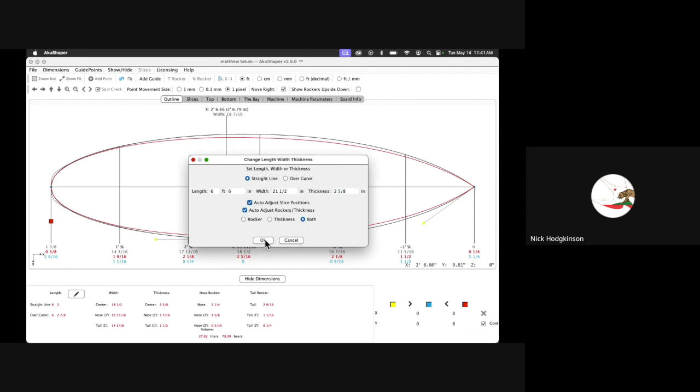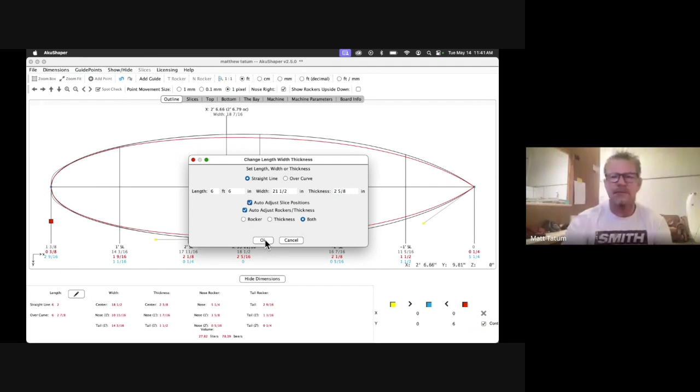It was already on. Before you click OK on that, do you ever not auto adjust? I do, yeah, sometimes - depends. For instance, if I'm working with a file I already have and just need to make some changes, like say I have an old round tail that I'm going to bump out and give a little hip at the foot section, or pull the nose and change the rocker, I won't auto adjust because the board's already there and I don't want it adjusting different little areas. But for the creation part, from the start, I'll leave them on and let them work, then go back and check my numbers.

So for this one, we got this board all set up. I can take this and kick off the original board real quick so we get here. For instance, this guy wants it at 14 in the nose, so start from the front.

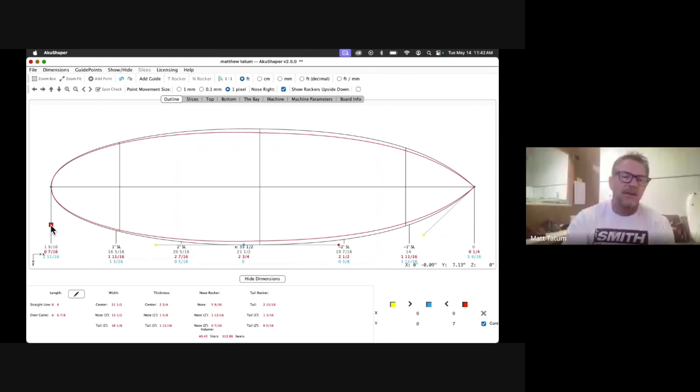I like to use these points like this. So now I got 14 in the nose, and then in the tail he wants it to be about 15.75, so that's 15 3/4. He's already got a model of this particular board - it's a shell shape, but this is like his updated version. The one he's riding before is a swallowtail, so he wants the updated version as a round tail, but he likes his numbers.

So yeah, a good surfer.

So this would be my outline, it's 21.5. I would turn on this guy right here, center mass, I want to see where that's at. And this right here, I want this moved up, and it moves that center mass up as well - see it moving? I want that pretty much right in the center, so now it's at 21. And you can see what the board looks like now, it's at 14 - by moving that forward I fattened it.

Yeah, and thinned it in the back. So I'm going to go back to my 14s. Now I got my center mass where I want it, take this thing back out.

I really like something that they did before - volume distribution, show volume sections. I like that because it allows you to set up a balance on what you're doing. Then I would go here and get my rockers.

So what I did first is, of course, got my outline, and we're just doing a quickie here. Then I went into my rocker. The next thing I'm going to do is my thickness.

So it's a little bit, like the 5/16 area in the nose right there. And then, kind of pick this up to get away from the pregnancy, but I like to distribute, so it's going to be 1 11/16 at the foot.

And then what I'm trying to do at this point is get my shape there, and then I can go back. I go for the volume that people want, because for instance the guy that's got this 6.6 is looking for right around, I think it was 37 liters.

Okay, is where he was at. And we're at 40. But I don't worry about that yet until I get all my numbers, and then I can adjust that, because you can do that. Obviously, you can get the volume through outline, or through how much you carry out to the rails. Same thing with the thickness.

This is a pretty cool feature, I like what you guys did here. Before, you used to have to kind of put it on a background and just kind of roll through your concaves. But so back to what we were doing.

Bring this back up, and I like to kind of see, for instance, to balance this thing is 1 11/16 in the front and at the foot mark, and 1 11/16 in the back at the foot mark. Kind of gives it like a nice little balance. You notice it doesn't get pregnant.

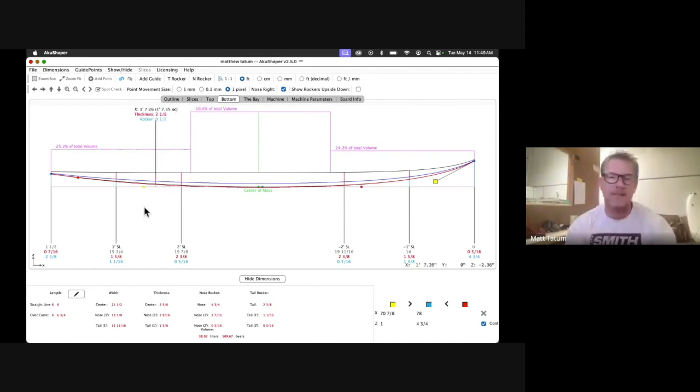So these numbers right here, the 1/16 and the 5/16, without sitting here doing that right now, I can get that rocker line that I want. And so, or if you're modeling a board, for instance, if you're ripping a board that you've already done or something, then you'll have these numbers as well. So you can make those match all the way across, and it'll give you your rocker.

And then the next, I'm going to go to the slices, right? And so if I want to add slices, like if I want to carry something all the way back, for example the double concave, if I want to carry that all the way through the tail, then I'll put a slice back here and then set my concave at the foot mark, and it'll carry through, and then I can soften it. And then same thing with the nose and the center.

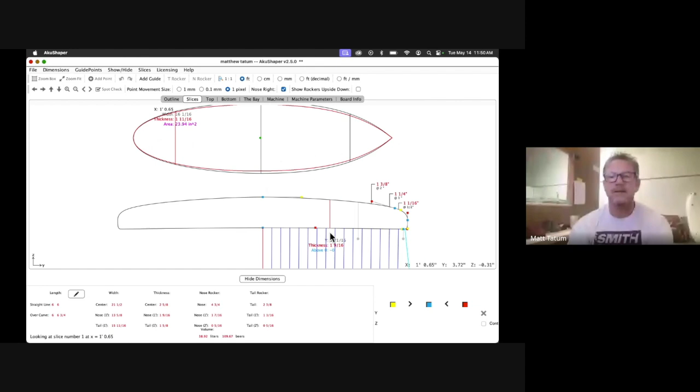So I personally like for that concave to be not necessarily in the center of the board. And I'm just making this board for this, this is not going to be the file I make, by the way. Okay, unless you want to use this file.

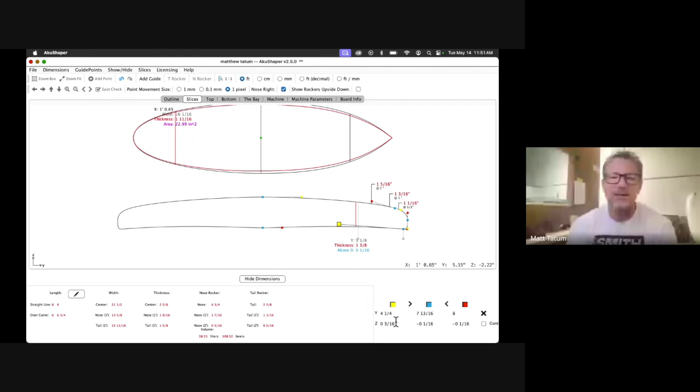That looks good, so this is like a 3/16 concave. I remember this from Simon, when I worked with Simon Anderson, and one of the things he always said to me was, keep it simple, stupid. Just kiss it, that's it. Kiss it, do a little bit. Nothing crazy unless you're trying to be crazy. But as far as like this performance board, keep these concaves in the low, simple area, and I think it'll be better. Same thing with this one.

And I love to use this guy right here all the time, the horizontal line feature. Okay, that'll give me this, right? And then I can go D, run around these, right? That guy right there. And then now I'll know how much concave I have set in there for this guy.

Which it's at 0 right now. So if I want some single here, what I do is I don't mess with that one, I'll bring this guy down. Right, and see, that gives me that concave there. And then I can measure that concave, obviously, and get those numbers to exactly what I want. Right now, it's an eighth of concave in the center.

And then the nose depends on what the surfer wants, or what you're trying to get out of the model. But usually on this particular board, I'm going to kind of leave the nose flat. If anything, I'll pull it down just a tad to give me just a little bit of single in the nose, depending on how I want the board to ride. So you get a little bit of single right there, and it's a 16th. It's minute.

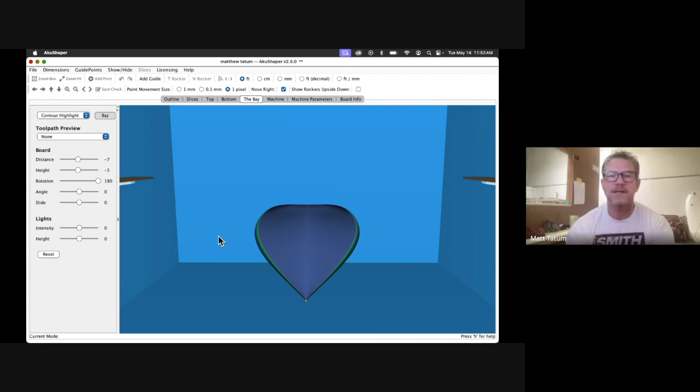And what I like about you guys' stuff is it'll flow those algorithms for you in those flows, and then you can go back and adjust those once you get it, especially with the new feature you have here, because you see where your flows are.

So see, there's no concave out here, and it's mostly right through the center right here. Where your fin would be out here facing that direction, basically an eighth or something off the stringer, or off the rail, and then your distance in with your toe.

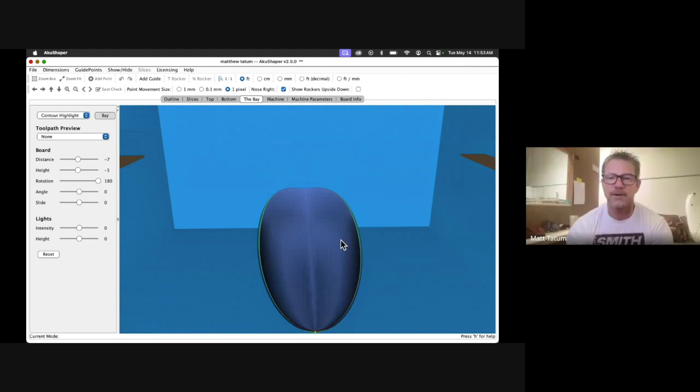So I like that. And you can see the double concave where the single leaves off and where the double picks up, right? So it's like single, and then the double starts to basically drain off right here. And that's the cool feature.

Another thing good about what you guys have, as far as this kind of shaping, is you can take that and move that concave and push it back out, which some people like to do. Push that guy back out toward the rail.

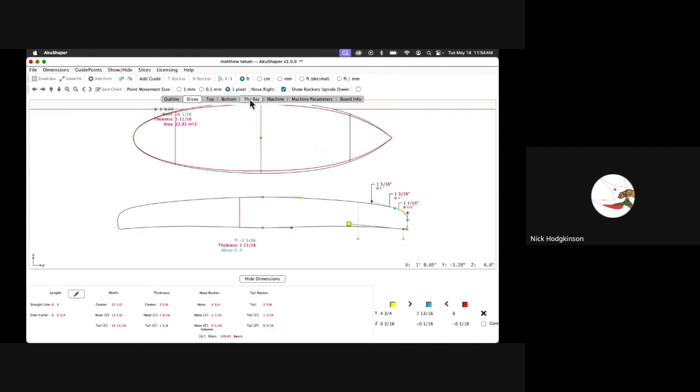And I'm sorry, I don't have my mouse here. I'm literally just using the buttons on my laptop. No, you're fine. Well, that could be a lot faster.

But you see how I did? I just moved those out and actually opened it, so now it's not so heavy on the stringer. It doesn't come off, and then you'll basically have foam around your stringer right there, so you don't wind up having a stringer showing, and then that becomes a problem later in glass, or through longevity as a stringer - everything starts to break down around the stringer. So sometimes leaving a little foam there just for that, and then move those concaves out.

Nice. And so that's that guy. Flip it over - you see a couple of hitches right there. I see one right there. Yeah, the top rail. Yeah, but I'm not done with that.

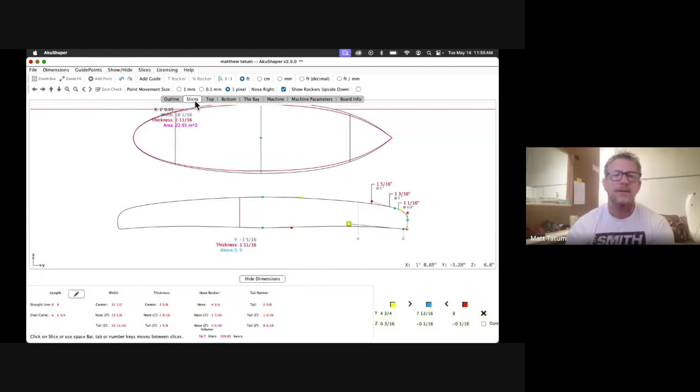So then I'll go over here, and we basically have our rail slices, right? And so we've already set our concave, and this is where we adjust our rails. This particular one, I like that back half. I have these rail numbers specifically on my models. So, somebody that's doing that, I like to connect this one right here for continuous and get that more of a straight up. There you go.

And so, see how I just took that and tilted that right there? Because before it was, and then my tuck - see how over here on this side, see where it's got an angle going? I kind of don't really care for that so much. I really want that edge to be flat and or outward. It could even be that, which I like a little more. But for the tail, I kind of like it to be straight up and down, because then as I'm shaping it, I can crown it if I need to.

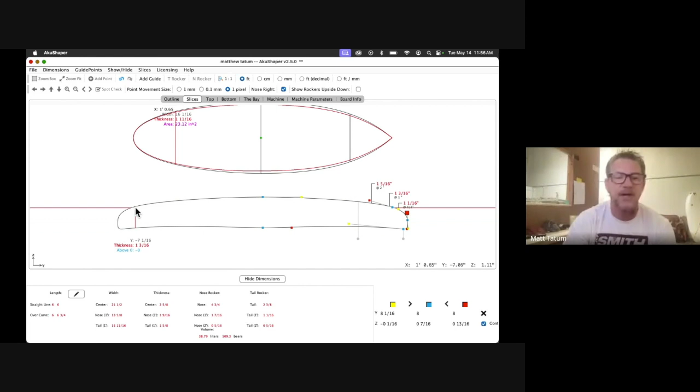And a lot of stuff I'll leave just as a shaper - the machine is just a tool, it's no different from my planer in that aspect. And so there are some areas I like to do. For instance, I like to get the rail pretty close to where I want it to be. And then what I like to do is pull that rail down, or even leave it boxy, depending on who's going to be riding it or whatever the case is.

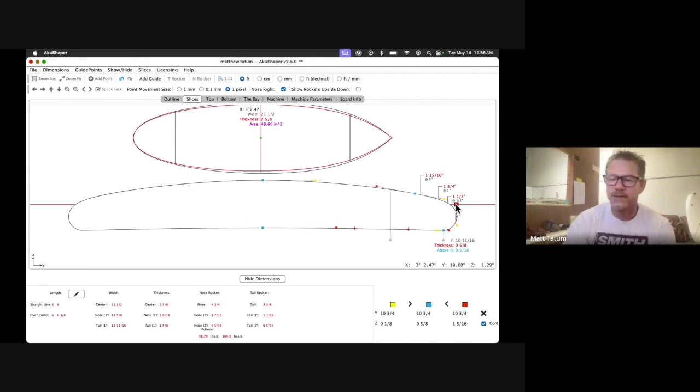Like for this one, I would take this one, continue that, peel that in a little bit. That's almost probably a little more tuck than I would want.

To bring that out, bring that in. So basically in the process of it, you see what I'm doing. I just basically did my outline, and then this is going to make a little box here. And then I like to keep that hard rail on these performance boards to get the release.

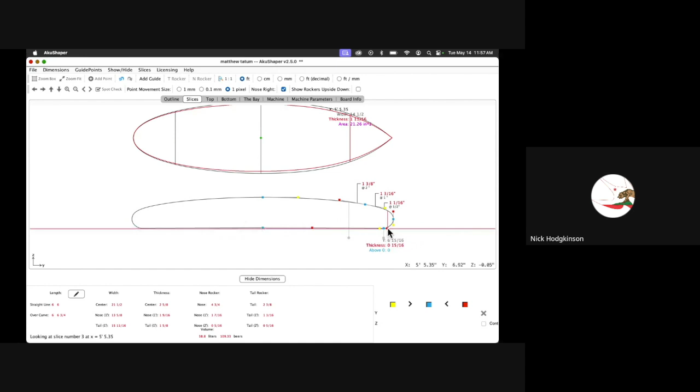And then same thing there. I would take this one, just move this in a little bit and pull that over, and then bring that down. That's kind of high for me. And then you can even move the apex down a little bit, which I think is one of the features you were going to show me about.

One of the newer features is the center apex there. So now, with the new feature that y'all have, you can see this line, right? Which before we had a kink right here, right? We went to that center and we pulled that out.

Now I'm going to get it just a little better. And then this guy here, one down here, and then one on the side. Pulls that rail down. Now I got a nice round rail with a releasing edge right down, and I really like that a little better. Same thing with the tail, a little harder edge, right? Water off. And then the nose does have an edge right there, and I'll clean that. That's for this performance board.

Jeez, I don't know what's going on. There's like 15 cop cars went by.

So yeah, it's all blended like that. Depending on how you want it, you could actually add a slice right there in the front, and continue that tuck all the way through. That's literally something I can do with my screen, and I have my little tuck measurement that I put on it with my tool. So if I want the nose to be tucked, on some of my lower performance boards I'll round that rail a little bit, give it a little more stability, a little softer, not so much release. But on the performance boards, I want this to give a little more release.

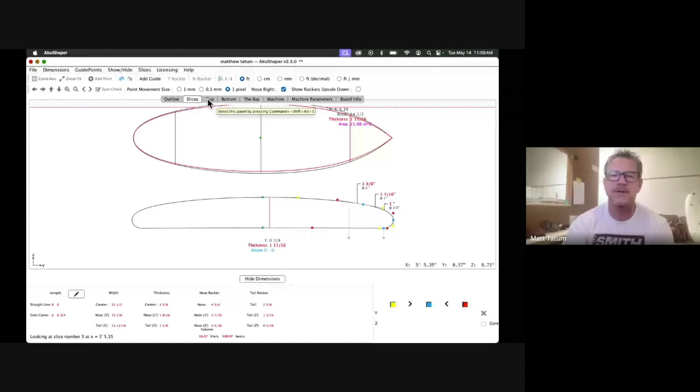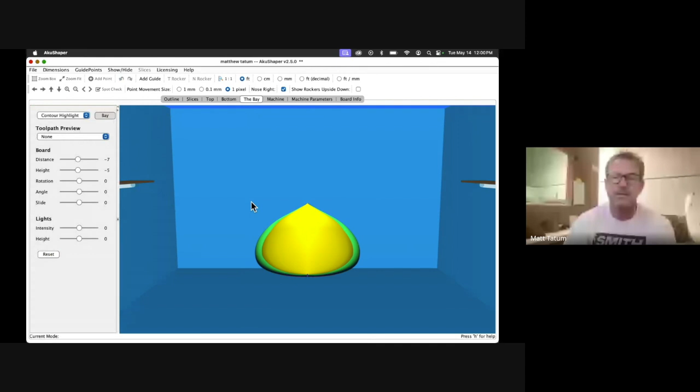So we'll go through real quick. Get that—looks pretty good. That looks pretty good. And that looks pretty good. So got that—that blue line right there shows you the center of the board, and this shows you the rail difference—well, not the center of the board, but your drop line. Nice, so now we got it cleaned up a little bit.

This right here, I still don't like that—you can see just a pinch. Yeah, and that's probably a height thing in the rail. Even though it's probably not a software thing, just a little difference, I definitely would work on getting that lined up. This is cool, but I would probably come in here to

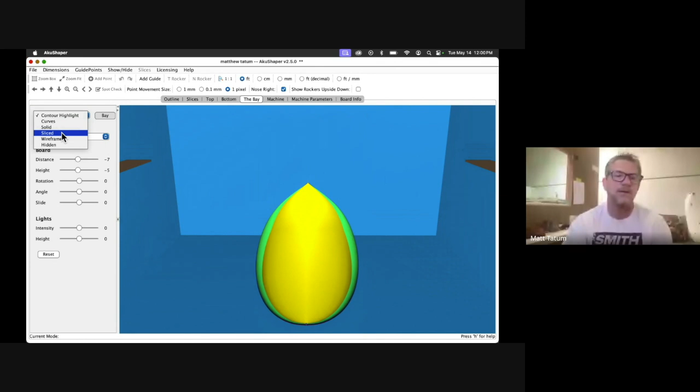sliced and, or curved—I like the curves a lot. This right here lays it over for you, and then you can see where your tuck lines are, and you can see, like for instance this one, if you look down through there, you can see the pinch right there. Yep, oh yeah, yeah.

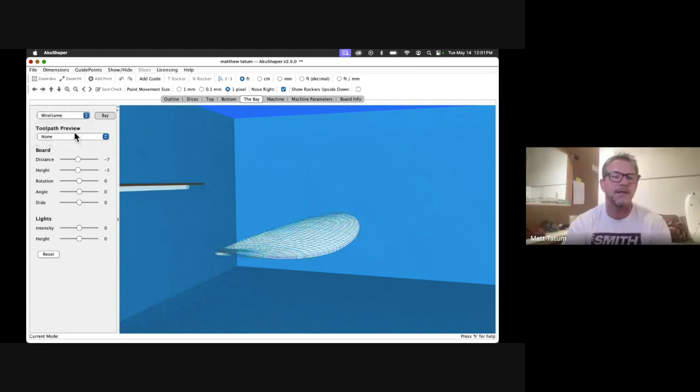And then another way you can see that—get into the wireframe, and you can see the lines, and the lines will kind of tell you, because if you're messed up, they'll all start to do something. But see, like I was telling you, it looks like it might be a little issue, because the lines look really good and straight there—or not straight, parabolic. Curves.

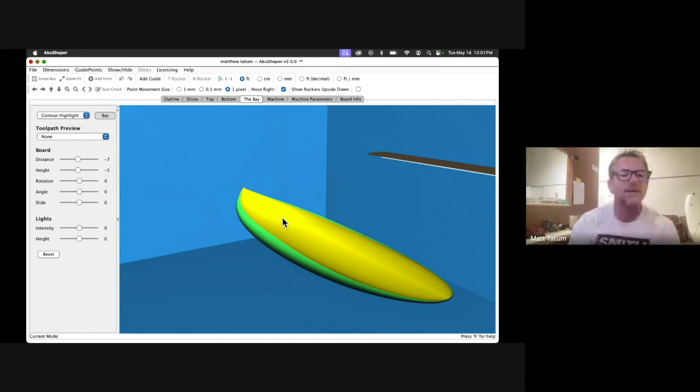And what do y'all have now? So yeah, you would have to go back and go to your slices. We see that in the center, and I'd be willing to bet it's probably this guy right here. Bring that back over—you see that? Yeah, now it looks really good, and it's just on there.

But if I was going to do that, I'd probably bring it a little more, or even bring this one up. Yeah, I see what you're talking about. And that nose right there is a lot bladey. So one of the things you could do to kind of chub that up a little bit—drop your point right here, keep your 14, and now you can bring your nose and scoot that up and get that just where it's not so daggone bladey. Yeah, but you kept your width there at one foot the same though.

So then what I do is now that I have that, you could click this right here. Save—it wants me to name it.

We'll call it the... I don't know, what's your last name? All right, let's call it Nick. Yeah, okay.

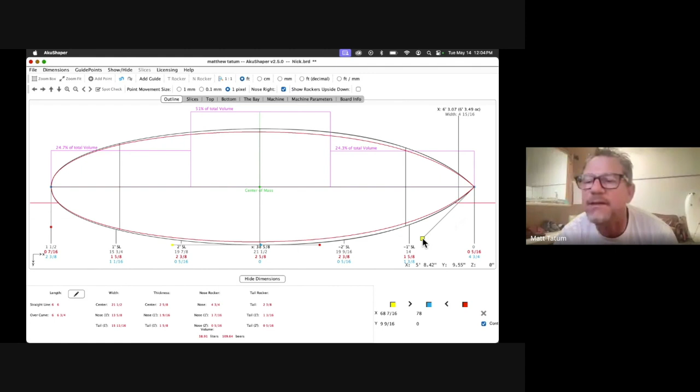There you go, now it should have done it. Yeah, and it's on now. So if I kill this, bam. Nice. See, now I can take this and drag it out, and round it on that nose or whatever I want. But now I can take this and match that up. Sorry if I'm jamming in on your screen with my face, but I can't see.

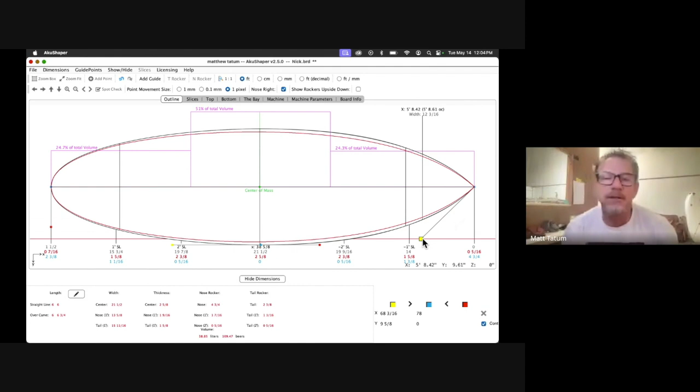But why do you do it that way? Well, because the machine, what I've found is the more points you have, the more the machine uses those. If I have a nice curve here, and then I put a point, that point can almost create a point where the curve is. And so this creates the algorithm for the cut path, and it basically just makes it really smooth, so I don't have a kink.

For example, if I wanted to, let's just say I just did this on a squash tail the other day. What I wanted was a hip right here. So I put that point in right there, and then I drew in the tail.

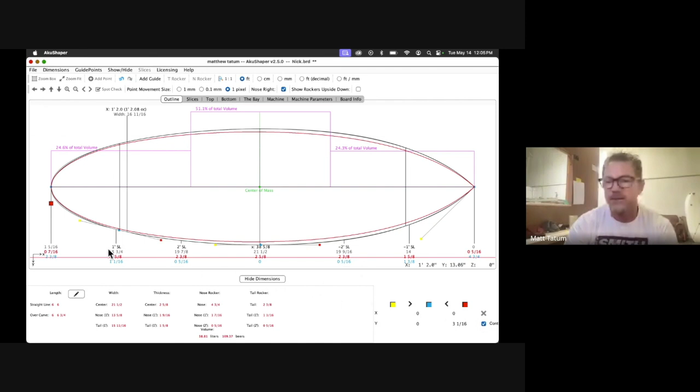This is going to be a round tail, the other one was a squash. And then I turned these off from continuous right here, and then I put a break in here. If you can see that barely, it creates a pivot right here, right? So that's where that break's going to start, and it creates a hip in there. So if you want that, I would leave that there so my hip is solidified, and then I can adjust this to whatever I want.

But I don't like that for traditional or even smooth lines, as you can see, because now I have a really smooth outline on that. Yeah, no bumps coming off the machine. Nope, we're talking minor stuff coming off the machine. You're trying to solidify something and create a shape that you can run with, and continually make that shape the way you want it.

And you also got to configure how you're going to scale this thing, because you can't make a 510 for the whole world, you know what I mean? It has to be scalable. This is a 6.6, but I would say if I really like this board and the way it came out, the shape and everything, I'd go, okay cool, I can run a model on this. So maybe this board would be 510 to 6.8.

And that would kind of be where I modeled this particular one. And then if somebody wanted something smaller, I would probably guide them to one of my round tails that have smaller features. Yeah, because you can see this one's volume forward, a little bit, it's kind of well spaced. But getting back to where we were.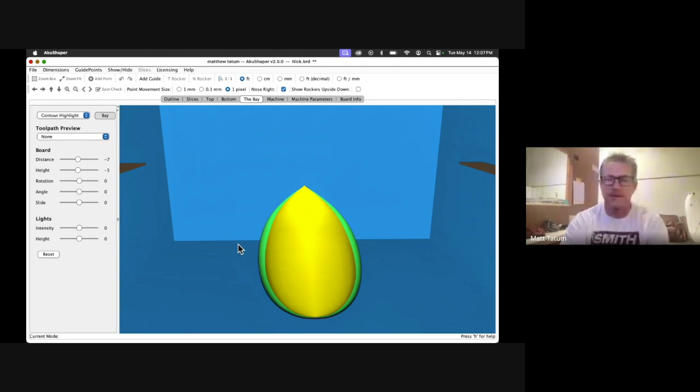In the bay here. So you can see now we got it nice and tuned up, and it looks good. Yep. And so I like that feature a lot. One thing I just noticed, curves. Yeah, so my tuck line is there.

But because I use that guy right there as one of my kind of shaping features, so to say, it might show up different on my other computer, but see, you can look at these right here and you can see if there's any kinks, and if they're going to be there, they're going to be where your slices are. But you can come in here and look at these and see.

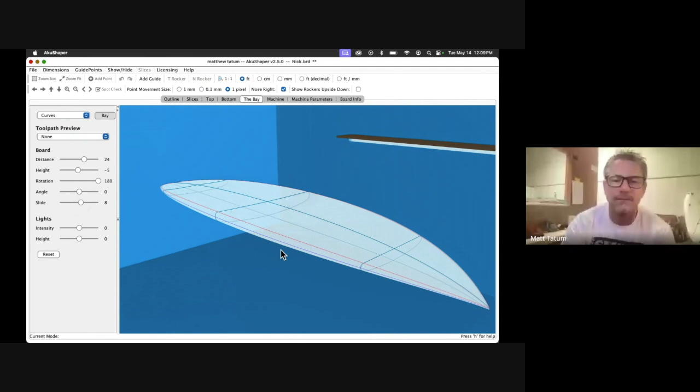If there's any kinks in there, and that'll help you. It also gives you an idea of your tuck based off of where your outline is on that. So I like that feature a lot because I can see if there's any kinks, and a kink there is definitely going to show up on the machine if it's showing up in the software. And that's something people should know if they're designing without a machine - if they think that won't show up, it's going to show up.

Using all the features here is important, to get a nice round curve or a hard edge, whatever you want, even if it's like a squash tail, for example. I use templates on my squash tails, so I try to get them as close as possible on the machine. Put something like this right here.

Kick that guy in, and that's what I would do for a squash, is I would go ahead. Sorry, that did that, that wasn't supposed to, that was weird. Okay, so yeah, I'd bring that bad boy.

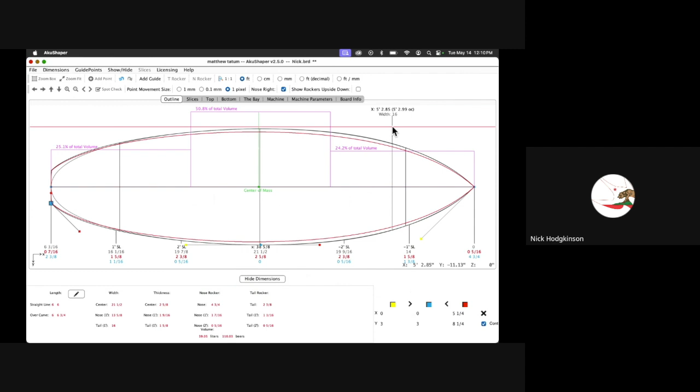Into wherever I want it using my 5 and 5/8, probably wind up going a little bigger because I like that size. Bump that out to the edge where it won't go anymore. And so now I've created the same board, same rocker, same outline, minus the fact that now it can be a squash tail.

Let's just say that rocker, that outline, and everything works really great, and everybody kind of likes what they like. So they call and it's like, hey man, that board's sick, but I love the way it rides, can I get it in a swallowtail? Yeah, same board, right. And so that's what allows you to do all your other tails.

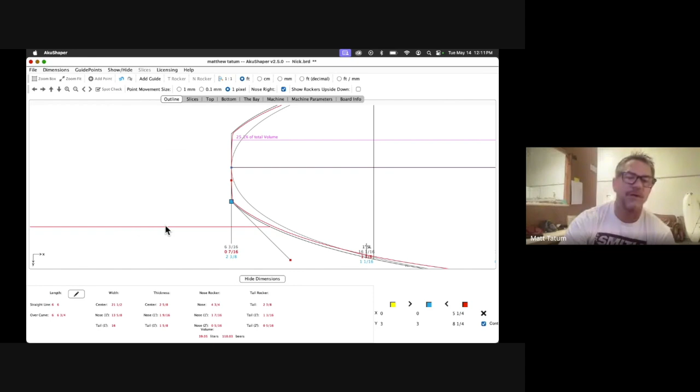And then I use this a lot, this feature, even on my 41-inch monitor. I really like to use this feature right here, the zoom fit, because that can allow for other things like bringing that up, picking that bad boy back on. Let's find it. There it is.

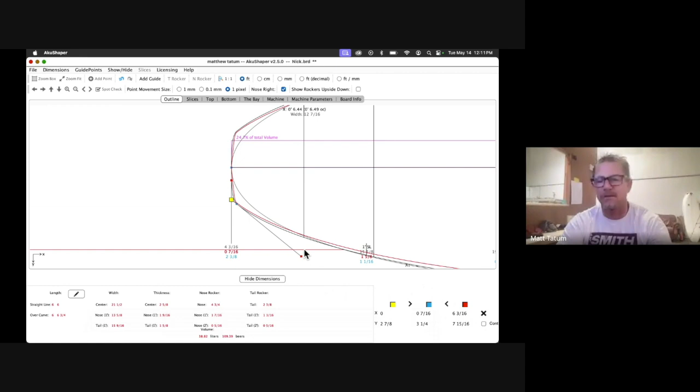And now I can make this guy, get in there, turn that off. Where's my line? There we go. Bringing this one down, go bringing that one up. Definitely harder without the mouse.

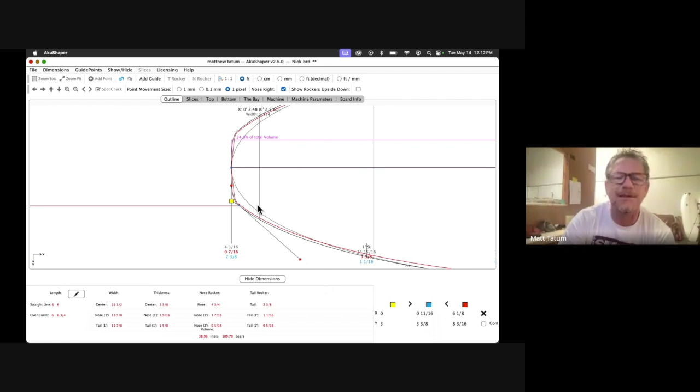And so essentially, you can see it, I don't have to finish it, but you can see now that I've created a squash tail, and I would make those corners a little more rounder right there. So yeah, this looks like a pretty nice board.

Yeah, it does. Yeah, that thing's sick actually. I'll call Rob B and be like, we got it in, it's done. Yeah, little round tail double concave. That's a sick little board. Yeah.

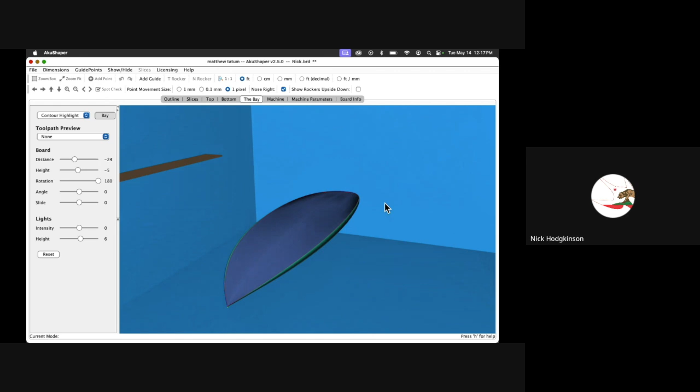And this would not be a final, obviously, but I would go through and make sure that the numbers are all correct. And that's another important thing, the machine does absolutely what you tell it to on here.

So if your numbers aren't what you think they are, or when you start making adjustments here and there, as you notice, we moved that volume forward. So as I moved that volume forward on where the wide point was, it also moved the nose way out and brought the tail way in.

And that's the feature you can turn off in the beginning, but that's also the feature you want. But then you can actually go back manually and put those where you want them.

So as far as balance on this board, I mean it's pretty daggone balanced. 24.8% in the front, 24.3%, and or vice versa. And then total volume, most of it, 51% of it's in the middle. Really, really balanced, nice. He's right at the CG mark.

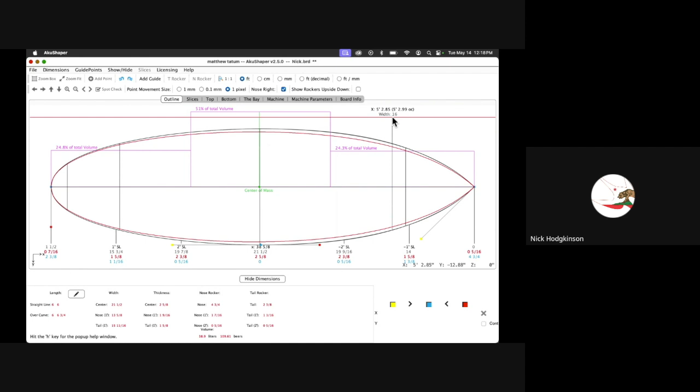So you see the CG line, you can change that a little, not much, and that also changes this. Take that back to 14, kick this back 3/4. So now we're back to where we were, and I moved the CG just a tad.

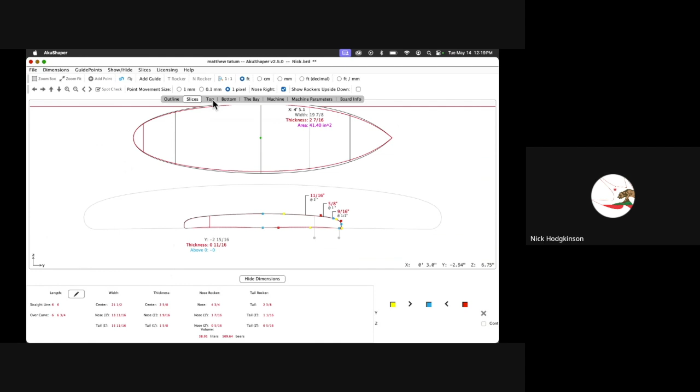Okay nice, yep, so I like all these features. And then you can also look, I like this too. This guy, yeah.

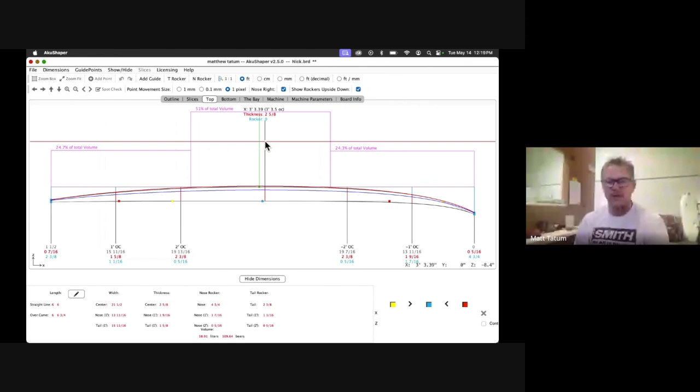So now you can look at your rocker and see how the board lays, because you know how people pick them up and hold them, right, and they want to see the rocker, and they turn it around and hold it down vertical and look at the rocker, and this is kind of simulating that, giving you like a little flow of that rocker.

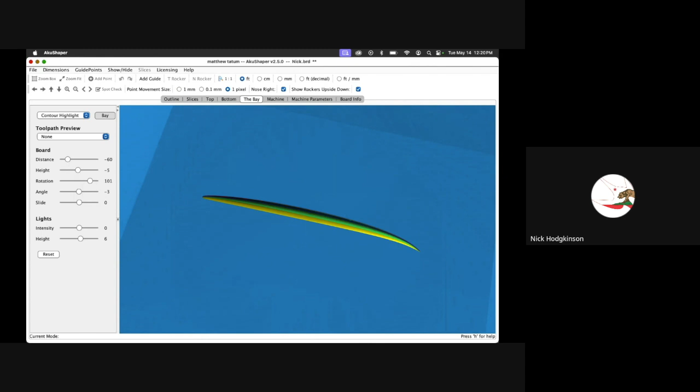Yeah, you can kind of do that in the bay here if you just kind of wiggle your bay through, you know, and you take this board, grab it from the tail or whatever and just kind of go half a 180, something like that. And if you wanted to do it like that, you could also take a picture of that too, to show somebody your rail profile.